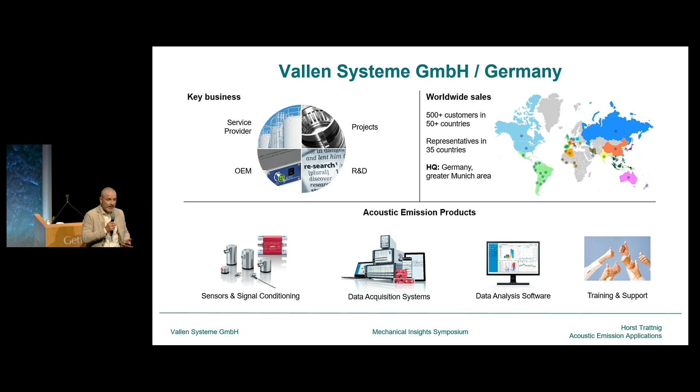What we are doing is we have all types of sensors, data acquisition systems, software, and for sure training, support, and that means also knowledge transfer, because we've seen many applications and we can help and guide you through the process to understand if acoustic emission fits your problem or not. In general, we are represented worldwide, in the United States, South America, so we have agents all over the world, and what we are doing is acoustic emission.

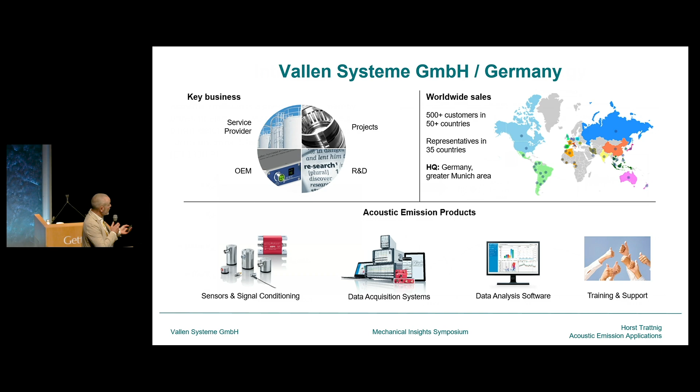And I know most of you know what acoustic emission is, but I just want to point out a few small, let's say, KPIs. One is we are measuring crack activity. So if a crack is growing, that's something that acoustic emission sensing can detect. It's a very small signal. The sensors can pick up displacement on surfaces of some picometers already. So very small displacements are something that acoustic emission can pick up.

We work in a frequency range from 20 kilohertz to 2 megahertz. That's the typical range for acoustic emission, where you can use this type of technology to detect acoustic emission waves propagating through materials. So that means you always need a load. And yesterday I've seen some examples for wood panels, where the load is temperature and humidity. And that's exactly what we have. We have the load, in your case, for example, temperature and humidity.

If then in wood, for example, a crack starts to grow, it generates waves in the material, and if you have one sensor, it can detect this signal and digitize it. If you have more sensors, let's say 4 or 5 sensors, you can probably also localize it. So that's basically the principle behind acoustic emission.

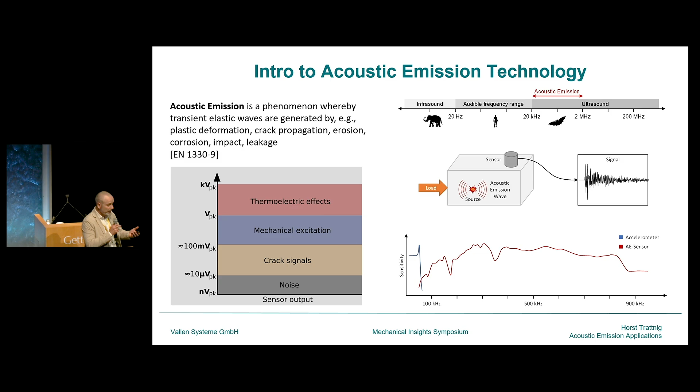And one important fact at the end: we can detect crack growth, but we can't size the crack. That always means that we can't tell you about the size, we can just tell you about the activity of the crack, the crack tip. For example, if that moves forward, that generates pressure waves.

Yesterday we also talked about sustainability, our carbon footprint. And I was part of a discussion where they said, on one hand, we save energy, and we try to waste less energy for cooling and controlling the humidity. On the other hand, you get bigger storages, you get more art that you have to put in storage. The museums are growing, so it's always a trade-off.

And yesterday we also had one slide where someone showed how the consumption of energy grows over the next years. And I think that's important for us to realize, because that's not only related to museums, to your industry. It's related to all the industries, because we all need more energy. We can save energy for sure, we all try our best, reduce by 20%, for example, but we also need carbon neutral energy sources.

And that's, let's say, also for us kind of a business, because if you go for sustainable green energy in the future, which has a low or no carbon footprint, you have to maintain the complete chain, from the production, the storage, and delivering this energy to the end consumer, to the industry, maybe to the Getty Institute. So we also need tools to make it safe and reliable.

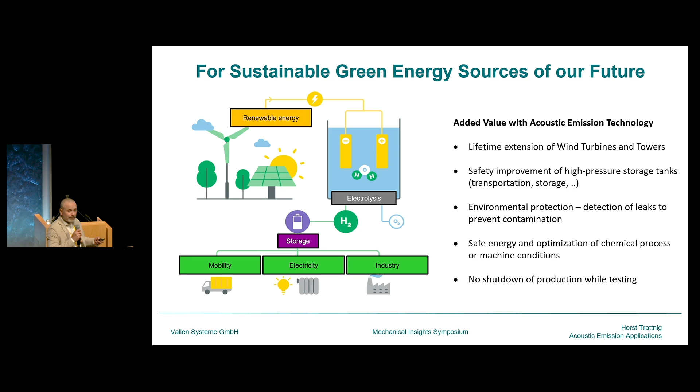One example is Neom City, because we have to produce this energy somewhere. I know here in California there are also many solar panels, many wind turbines. If you come here by airplane, you can see many parks.

And one of the places for Europe where they now build a new hub for generating this energy is Neom City. That's, let's say, the fuel of Europe in the future, but it's in the Middle East, so they have to store the energy, transport it to Europe and distribute it. So we definitely need solutions for the whole chain to make this safe and reduce risk for humans.

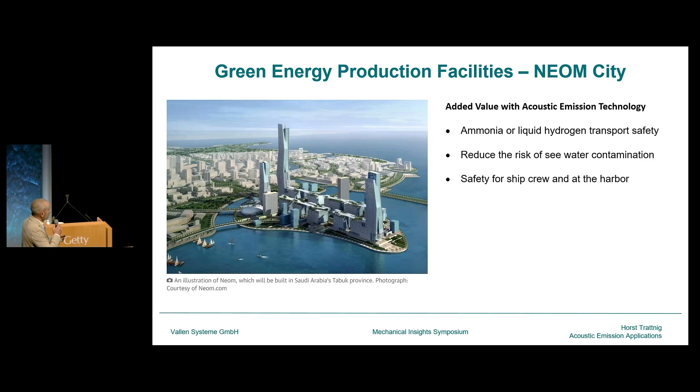But where is acoustic emission used in this area? For example, at wind turbines for lifetime extension.

Because these days, some of the wind parks are already 20 years old. And the lifetime of these wind parks was designed for 20 years. Now we have two options. We tear it down and build a new one, which is not really the best solution for sustainability. So what acoustic emission can help with is to increase the lifetime of these wind parks and to make it more sustainable for the future.

There are, let's say, two main areas where acoustic emission can detect defects, or give information about the condition of the wind turbine. On one hand, oops, wrong one. On one hand, the turbine itself. You have moving parts there, and you can monitor the condition of the bearings and of the turbine in such a wind turbine. And on the other hand, the tower, where there is also a lot of force on it, and they can detect if the tower is still in good condition, can be used, or if you have to maybe replace it.

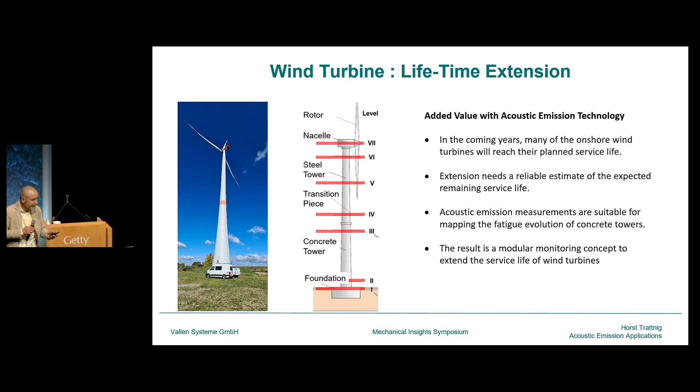Another example where acoustic emission is used to extend the lifetime is hydrogen power plants. These power plants struggle with what they call cavitation. If you have a generator, cavitation is small bubbles in the water when the generator is turning, and this generates defects, or degrades the turbine itself. And therefore they are using acoustic emission as well, because they can detect this type of cavitation and get a grading: if there is a little cavitation or a lot of cavitation. And then based on that, they can adjust some parameters to bring the wear of the turbine down to a level to extend the lifetime as well.

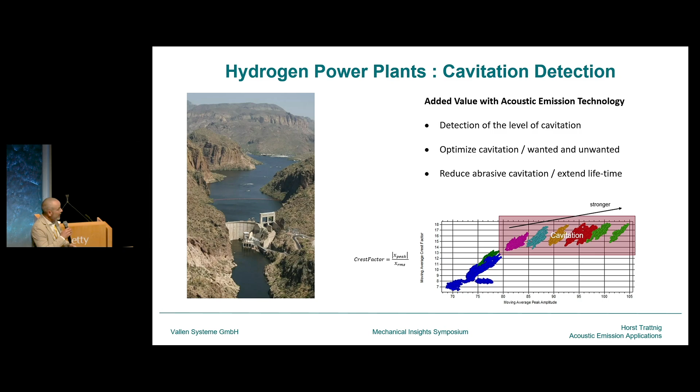Okay, we generated the energy. Now we have to store the energy. There are several ways. If you use hydrogen to store the energy, you have pressure vessels with up to 11,000 psi. That's really a lot. That's a bomb. But these bombs are on our streets, with these trailers. So to ensure that these trailers are safe, they use acoustic emission to test these storage tanks after production, and at the next step for requalification after, let's say, 5 years.

Another example is liquid hydrogen. They really go down to -423 Fahrenheit, which is very cold, but it makes it liquid without too much pressure. And if you need it like natural gas today, if you want to have this on site, here at Getty or wherever, you can use this, for example, to store this hydrogen.

Or you can store this green energy in a chemical way, like with ammonia, which is stored at -33 degrees Celsius at normal air pressure. That's a very common way, because ammonia is used worldwide for fertilizers, but now they also use it to have an easier way to transport energy worldwide.

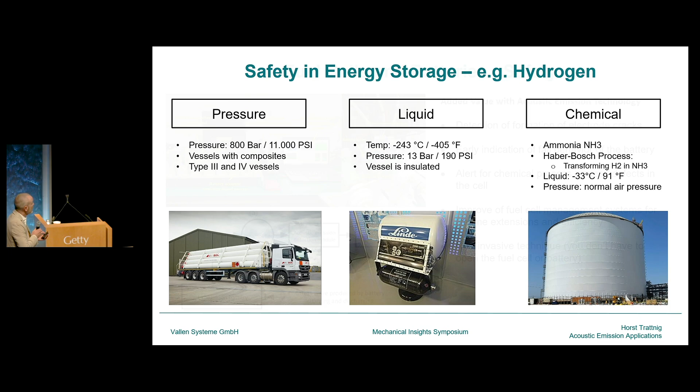We all have our smartphones in our pockets. We have batteries inside, and the application for batteries here is to detect chemical processes inside batteries. I think most of you have already seen defects of batteries when they burn, when the chemical process starts. And because acoustic emission is so sensitive, you can detect the stress generated by internal defects, by chemical malfunctions, very early. Researchers for new batteries are using acoustic emission as one sensing technology to understand the status of the battery and when the chemical process starts, before the defect really is visible. So that's one of the applications for batteries.

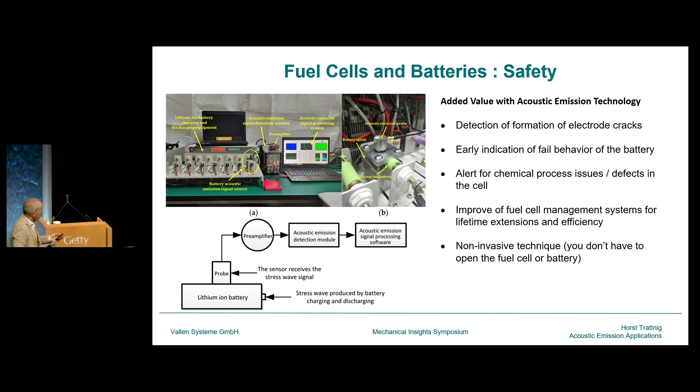That's an example from our standard business over the last 40 years. If you store gas or oil, those are the typical applications where they use acoustic emission for requalification of storage tanks or pressure vessels. In any case, acoustic emission can always give you information about cracks and leaks, for example, to not contaminate the environment.

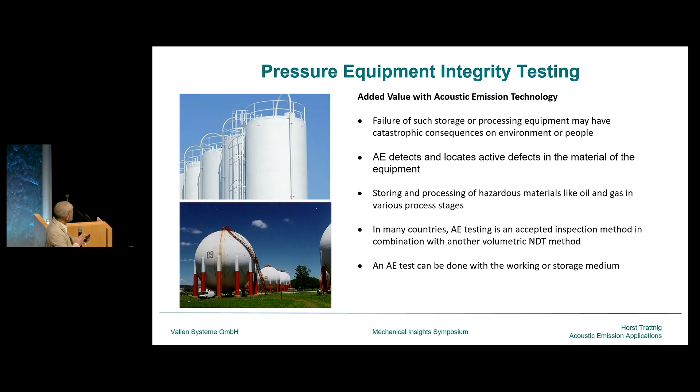Leaks are also important for all of us, because nobody wants to lose water, energy, whatever is in pipelines and controlled by valves. So acoustic emission is used, like here at an ethanol plant, to detect leaks. There are service groups that go out to these plants, check 20, 30 valves a day to see if they are leaking or not, and give a report to the team. Finally, the benefit for the owner is they know which valves are leaking and how severe it is, and they can put this on their service plan to know what should be done in the next service interval.

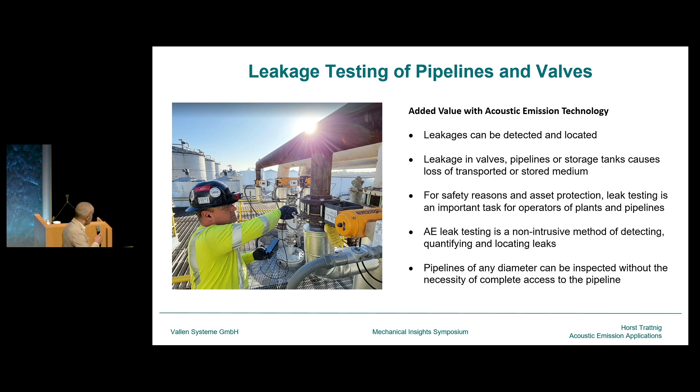In Europe, but also here in the US, we have a big topic with infrastructure, with old buildings. These are some examples from Germany, but also here from the US, where we have on one hand side post-tension concrete bridges. That means every bridge with concrete has tendons inside. They are pre-stressed, and after some years, if there is corrosion inside, they start to break.

And if one or two of these wires are breaking, it's not an issue. But let's say if 20, 50, or if 30% of these wires are defect, then it's really a severe problem. So it can really break down, and you can't see it from the outside. Most of the time, they can't see it from the outside because the wires are 2-3 centimeters below the surface.

So that's why acoustic emission is used for many of these bridges already, to prove the safety for people who are walking through the bridges, who drive through the bridges, and the same for sure also at tunnels, because nobody wants to drive through a tunnel and be part of the collapse of such a tunnel. So that's one of the applications in the infrastructure, also for buildings. We also have pre-stressed concrete in buildings, and also there they already use acoustic emission to listen to the structure if tendon wire breaks happen or not.

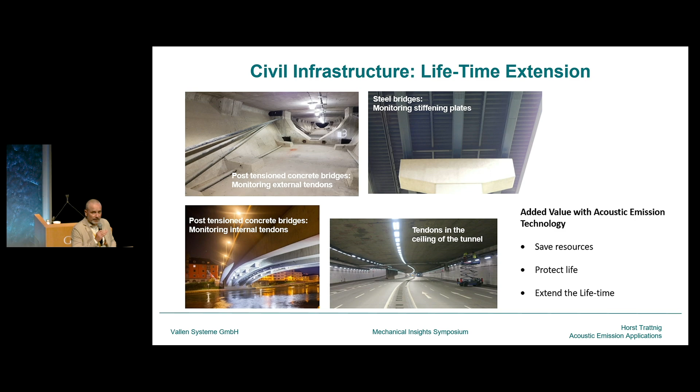So what they can do, put a sensor to this crack, and the acoustic emission signal can give you an indication if the crack is stable or the crack grows. And just in case that it really grows, then they send an engineer there to verify how much it grows.

We had a presentation about NASA. For sure, we are also customer of NASA. This is the Langley Research Center where I've been last year. We also have customers at SpaceX and NASA, especially for carbon fiber materials. Because what they are using, they're using the COPVs. So this is carbon fiber material to store hydrogen and other substances in their rockets.

And based on that, they are using acoustic emission to qualify the material, the carbon fiber, if it has delamination, if they already have fiber cracks. There are methods for acoustic emission which can give you an indication if the material is in good condition or it already has defects. And that's what they are using. But for sure, not only NASA and SpaceX, all the other industry partners who are using COPVs for various applications.

That's now closer to the conservation and cultural heritage. This picture here is V&A in London. That's where I met Michael this February. I met Michael last year the first time, and he really gave me some headaches because it was really interesting for me to see that here in the cultural heritage industry, they have different problems than the standard industry. So we have to tweak the software a little bit, support him with changing the software to get the information he needs out of the data.

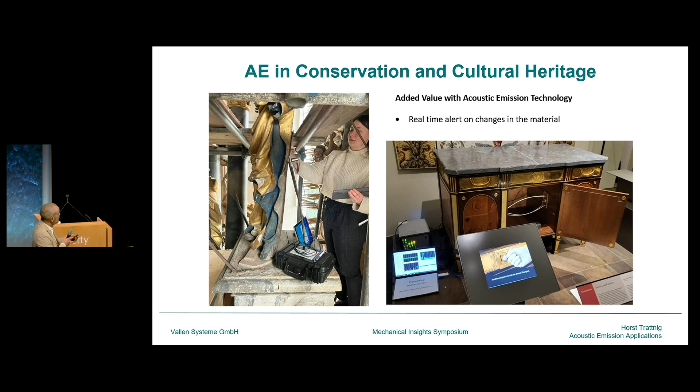Material testing is another example. We have many customers who are doing rock sample testing. So if you have stone, or this is a salt stone here in this case, they take a sample from the big brick, let's say, and if they do some tests on it and put sensors on it, they have the advantage that they can get localization of the damage zones in the software, also damages below the surface, because most of the time you just can see the surface. And that's what they are doing when they do characterization, for example, of stone.

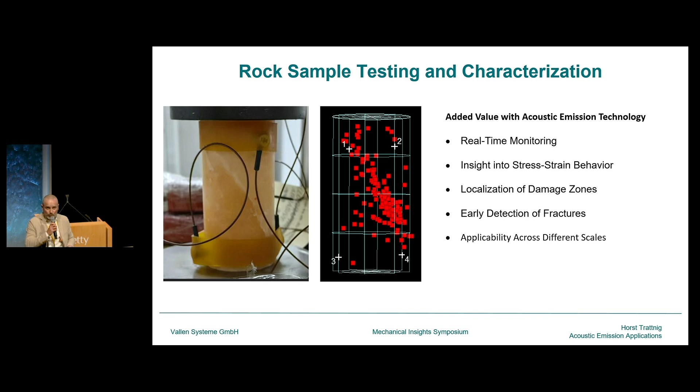And one other example for us is about safety. We have a Ferris wheel, for example, in Munich, where they also have a system on board to monitor 24/7 if the Ferris wheel shows any kind of wear over time, and they can add this information to their service plan to go to specific locations where they get information from the acoustic emission, to make service, to look deeper into it, if the wires are okay and so on, to have a safe and proven, let's say, environment here for enjoying going on the Ferris wheel.

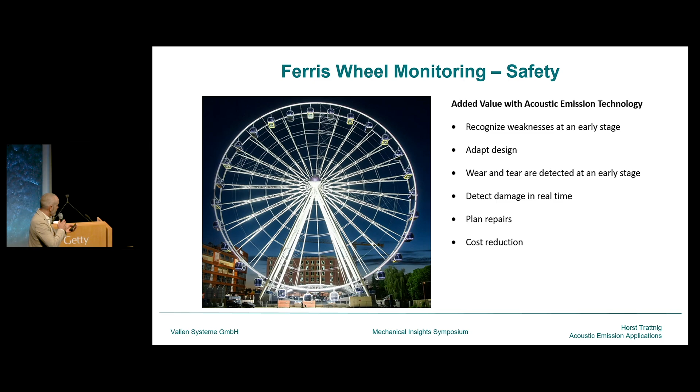Okay, that's my last picture for today. Because today should be my segue now also to our panel discussion. We will talk about how to bring the industry and the other domains together with your industry, with conservation, with researchers. And what I learned is we have to meet each other like we do it now. This event here, this summit, is really fantastic. So many high-level presentations and insights about different applications in your field.

But I think we have to extend it and meet each other, also from other domains. And that's what I recommend. And that's why I'm looking forward to the panel discussion later on. What are your inputs? What do you think we can do to make meetings with people from all over the world possible, to exchange ideas? Because every domain has a different perspective, and I think this is a value that we have to share, and this is how we can grow together. Thank you.